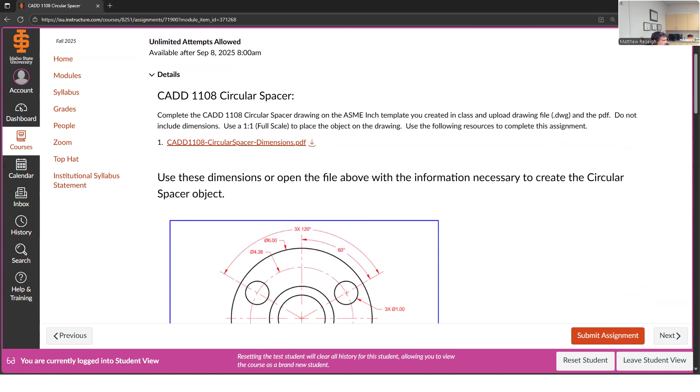All right, so let's open this up. Pretty much the same assignment description, drawing PDF, one-to-one scale. It's a circular spacer. So I've got my PDF here, already open. This one - I'll come back to it in just a second. And then it's essentially this. So here's the dimensions I'll follow, and when we turn it in, it'll just look like this.

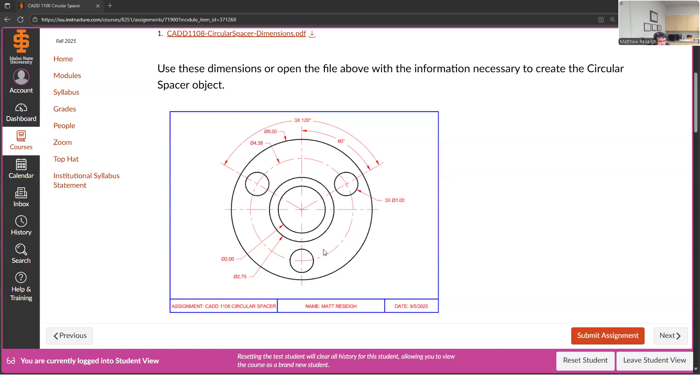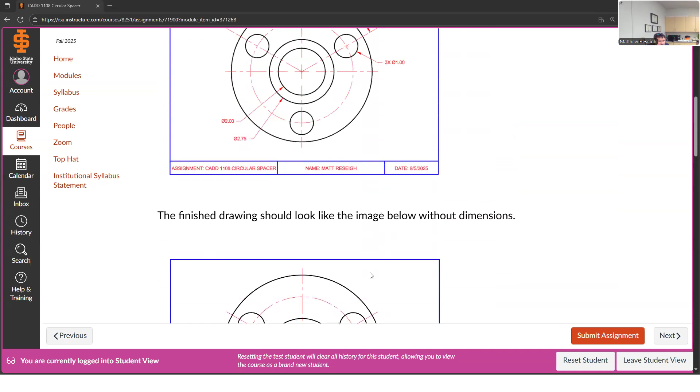One thing I've noticed that I can change on this is maybe I don't need these center lines that are coming from center of everything out to kind of nowhere here. I'll show you why I potentially don't need them on my drawing. It's okay if you included them, but really they are to catch dimensions, and where we're not dimensioning, I don't really need them. The reason those really exist is because I'm pulling a bunch of dimensions from them, referencing some degrees dimensions by degrees that would be captured there. So that's why I can eliminate them, and I'll talk through it when I get there.

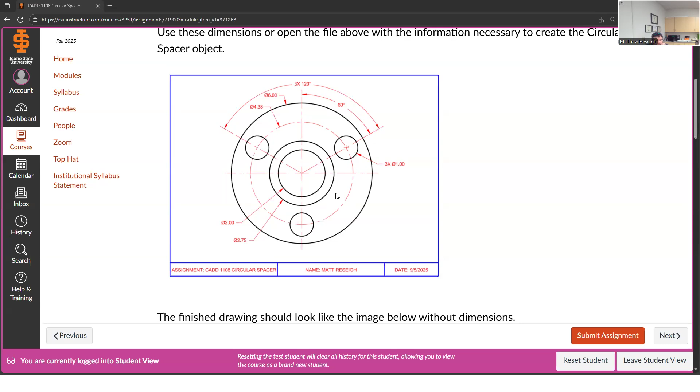The other thing you might not have is this - this one shows a little center mark. I'll zoom in just a little bit - the reason it shows a center mark here is because it's affiliated with this dimension. Once this dimension was put on here, and the way the dimension style was formatted, it dropped that little center mark. You can choose in a dimension style to either leave those marks or remove them, and I actually didn't catch this till I looked at it again. I was like, oh, that thing dropped a center mark - that's actually because of this dimension pointing to it.

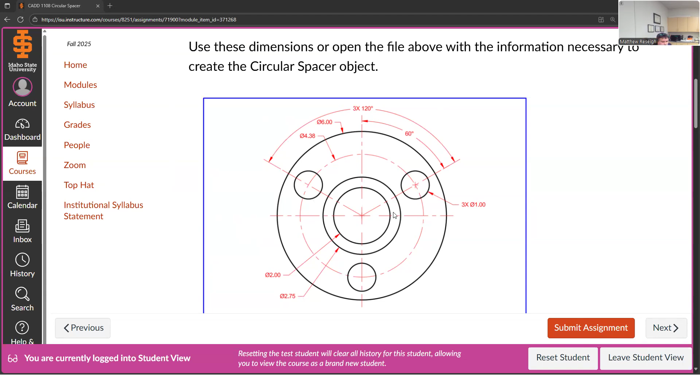And where these ones don't have dimensions pointing to them, they don't have that little center crosshair. So let me just analyze what's going on here just a little bit. I think this is sufficient - I could look at my PDF, but this is fine.

It's just a 6-inch diameter circle, and it's got these two inner circles. One of them's 2-inch diameter, the smaller one, and then the other one comes out 2 3/4 diameter.

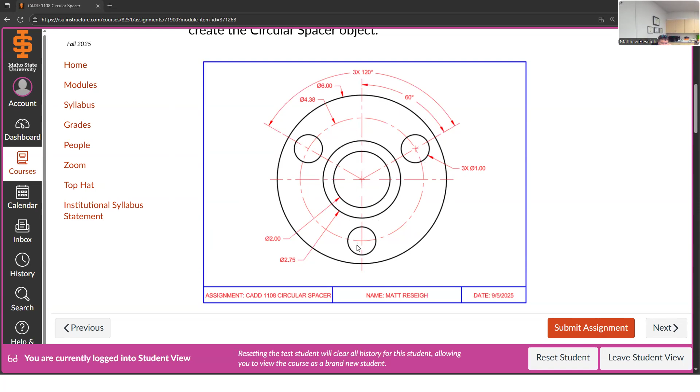And then we have this pattern of three 1-inch diameter holes. This is a new command type that we'll learn while we do this assignment, so I'll focus a lot when I get to putting these holes on. I think the way I'm going to proceed is I'm going to build the large circle and the inner circles, and then I'll probably do my crosshair, my center mark, to show that everything is concentric. And then I'll come and worry about these three holes.

The other thing I need for these three holes is to know how far they are spaced out from center. Like this center, if I could measure this over to where that is, where center meets center - that's what's going on here. This diameter is actually a center line diameter, 4.38, that's where the center would cross in relation to the center of the part, or all of these other three circles, the concentric nature of those, how far out they are. This is 4 3/8 across as a diameter. It helps me know that to even be able to place how far those are out from center. So I'll come back to that when I do those three hole patterns.

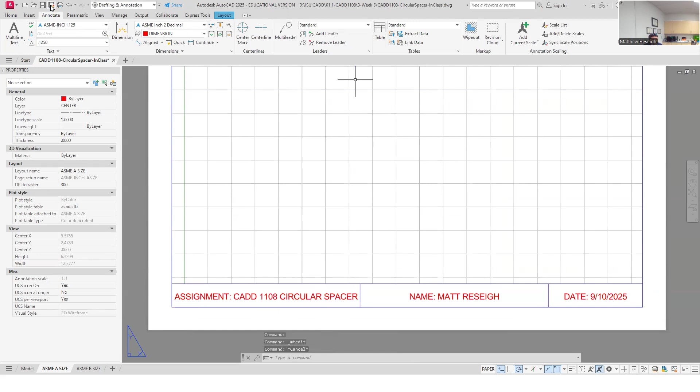Let's do the rest first. So I'm going to go to CAD, and I've got my template already opened. I've actually already jumped in here and renamed this as my circular spacer template, and I've already done a save as. So I opened my template and did a save as, and I'm on a DWG file type, right?

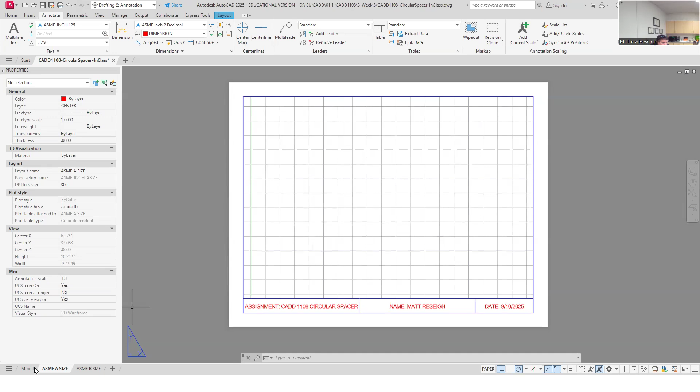I opened my template, saved as, gave it a new name - circular spacer, CADD 1108 circular spacer in class, is what I call it. And then I changed my date. So really, I've done a little bit of work here on my drawing, but I haven't done any modeling yet. So let's jump in and do the part modeling.

So I'm going to jump over to my home tab and jump to my visible object line. I don't feel like I need to build the glass pane for this. I'm just going to start right from the circle information that I have, and whether I draw center radius or center diameter circles, I'll show you something that I have found. I've told you probably several times that center radius I thought was always the default one, and so I also found a little quirk to this.

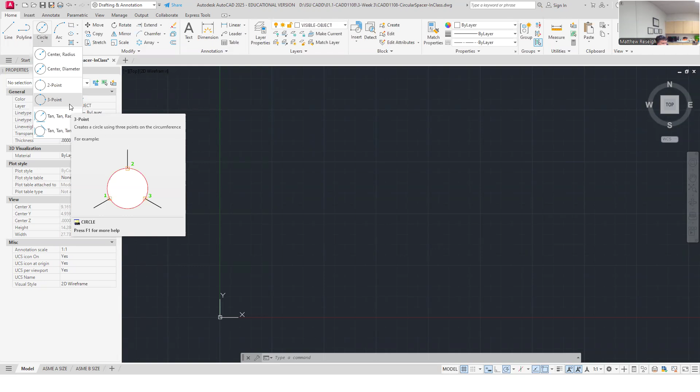If I'm choosing center diameter to draw this first 6-inch diameter, I'll just come out here somewhere. 6-inch diameter is the first one I'm going to draw. Enter. So I've got that one drawn at 6 inches in diameter. Do a quick check. Yep, 6 inch diameter.

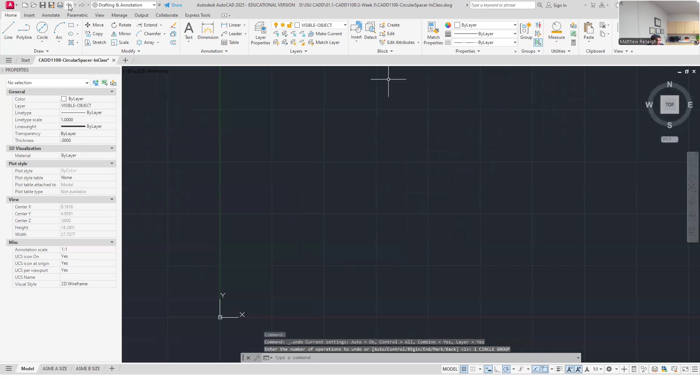So from there, if you want to jump into the last command you use - oh, that might mess me up. Back up just a minute. I'm not going to measure that. I'm going to drop this one more time. Bear with me, I'm trying to get this to maybe malfunction for me a little bit and see if I can troubleshoot what might happen.

So there's me just doing one circle, entering. I've got two more to do. So a quick way is I always could go back up here and do that, or I could actually type in the keystroke for circle, starting with C. I always think the keystroke's going to probably start with the letter that the command starts with. So C for circle, let me type in C.

There's circle, but I'm not going to do that either. Another way to get back into the command you used last is just to hit enter. Enter is to close the command when you're using it, but it also is the way to reopen it really fast. So if I hit enter, it wants to know the center - it goes right back into the last command I used, which is circle in this case, and it's asking to specify the center point of that circle.

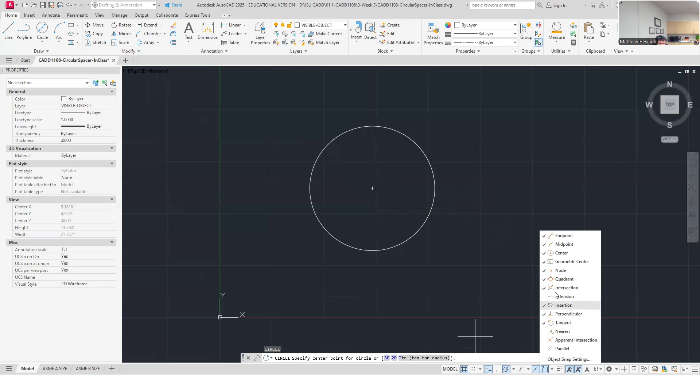So I'm going to have them be concentric because I've got center chosen on my object snaps. I'm going to choose the center so they're concentric, and then I'm going to pull out. But what you will notice is if you go back into the circle command with a quick keyboard shortcut - if you've used center diameter, which is what I use to make that 6 inch diameter one - when I hit enter back into the command, it actually goes to that default CAD way to draw a circle, which is center radius.

So this is perhaps a hiccup if you like to use that. It's not a big deal if you're always used to going back up here and choosing from the drop down the right one, but what I'm saying is I actually have to watch out if I'm using those quick enter commands. It wants this to be a center radius circle. And so you might not know the radius of this one, but you can always, from a center radius, if you look at the command line, get to diameter by typing D.

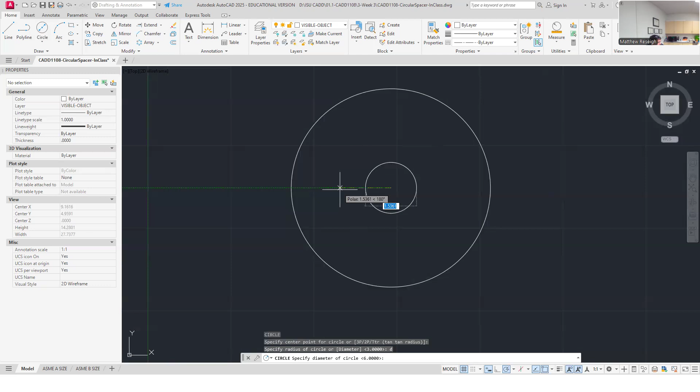And then really on my print, I have like a 2 inch diameter one. So I'll put two, and then I need one more circle. And this is where you can get in trouble, right - it's pretty common just to hit enter to go back into the command, and choose the center. Then the next one is a center radius again, but I can put D for diameter. The reason why the next one might be hard for you to input the radius is if you don't know the radius.

I feel like the radius is easy to see when it's a 6 inch diameter - it's a 3 inch radius. Half the diameter is the radius. If a 2 inch hole, half the diameter is the radius of one.

If I look at this - well, maybe depending on how familiar you are with dimensioning right now, or dimensions in general, or measurements - half of 2 3/4 could be hard for you to come up with in your head. I mean, you have a calculator accessible right here in your CAD that you could just use. You could punch that number in if you wanted to input the radius, or you could just do D for diameter. But I'm just showing you that, yeah.

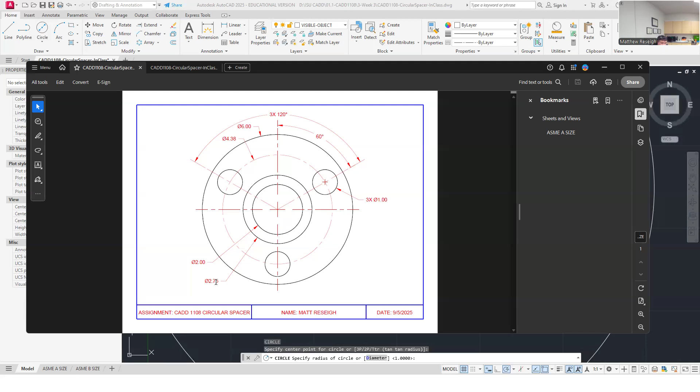So some dimensions get hard, especially some circular weird dimensions, and they might get hard to know what the radius is, especially if the print you're working from shows diameter, or if the sketch from the engineer is talking about diameter of holes or something. Eventually you'll learn that 2.75 - 1 3/8 is half of 2 3/4, or 0.375 is 3/8, 0.375. You'll start to build some familiarity of this as we work with it, and as I bring it up to your attention all the time. So technically I can look at that radius of 2 3/4 and say that's 1 3/8 is the radius of that. But I'll just stick with diameter.

So I'll say D for diameter and say it's 2.75. There's my three holes, three circles.

And let's do some center marks. So I'm going to go to the center layer, and I'm going to go to the annotate tab, and I'm going to grab my center mark. I feel like I'm going to express all the concentric nature of these holes by just choosing that.

And then I just need to format that a little bit for ASME standard, right? I'm going to select it and go over to the properties tab and make sure the extensions on those are 1/4 inch extensions.

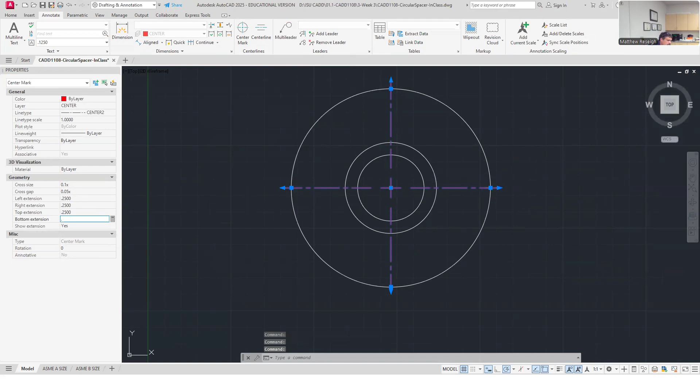And so now this is going to be the ASME standard extension, a 1/4 inch from that triangle to here. Oh, I can see it show up if I hover. That's the ASME standard we'd want. I mean, I could break that rule every once in a while, but if there's no reason to, then don't break that rule.

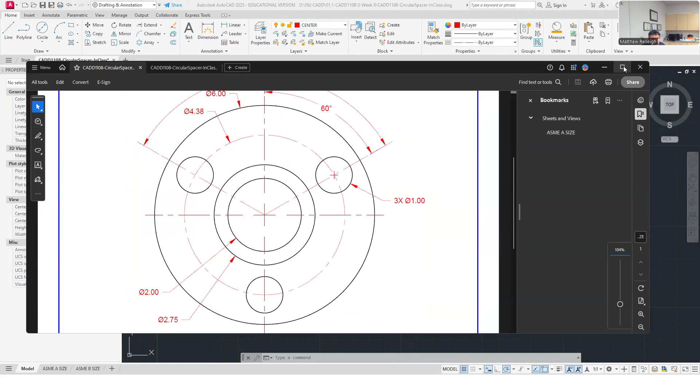Oh, I need one more circle too, and I'm on the circle center layer. Sorry, I need a circle that's on the center layer because my drawing— I'll zoom in a little bit. Maybe I'll just maximize this.

This is where these other visible circles fit, their centers hit this. So I need to draw this circle just by diameter, 4.38. That one might be a little harder to divide in your head, but 3/8 I feel like is shorthand for 0.375. So 4 3/8. Two decimal places will round 0.375 up to 0.38.

And then half of that would be 2, and half of 3/8 is 3/16. So it's kind of funny, you start to learn that 3/4, half of that's 3/8, half of that's 3/16. So this would be 2 and 3/16 if I was using the radius input.

You could use the calculator to figure that out, or you could just go to diameter. So 4.38. And I don't have to use three decimal places, I don't have to assume that that is 3/8 like I just said. I'll just type in this number, 4.38. So let's do that. We'll pull this over.

This one, my circle command, I'll do a center diameter one, sure. The center is going to be all concentric. Just make sure I get on the center. If you have this going on where now I've got like a crosshair and I've got maybe some conflicting object snaps here, remember, if I want to isolate an object snap, this is super important to learn.

So I try to repeat it as many times as I can, but you would hold down Shift and right click. And it brings up this menu that is hard to remember. And it's really how I isolate and override all the other snaps and just really focus on one type of snap. So hold down Shift, right click when you're in the command.

So this hole is going to be kind of hard to place given the geometry that I've placed on my part already. Like with the circles that I've drawn, even with the crosshair or the center mark, I don't really have great geometry available to snap. Like if I wanted to draw this circle first, there's really no object snap on this circle to snap this to at 60 degrees.

I don't use it the same way where maybe I'd cursor over across this 60 degrees. I'll show you the other way I do it. As I look at this, I'd say maybe I won't start with this one because there's no object snap. But here, this one catches my attention because this hole is kind of on my center mark, at the 6 o'clock position of the part.

Because I've drawn this circle where it intersects the crosshair, this is going to be a snappable point here, and it's going to be where I want. I want this circle to be out on this hole circle diameter. I want those centers to match each other, and then I'll be able to pick that where it intersects with that center mark.

That's not intuitive to know what geometry I should draw to help me snap. There are other ways I could do this, but this is the way I visualize as the easiest way to proceed - I'm going to grab a circle by diameter. But what I'm saying is I just don't have a snap up here to snap to. I've got quadrants of circles, I've got centers of circles. I have no way to know where this 60 degrees might be, 60 from 12 o'clock over to there, or 30 degrees from perfectly horizontal up to there. I just don't have a snap there.

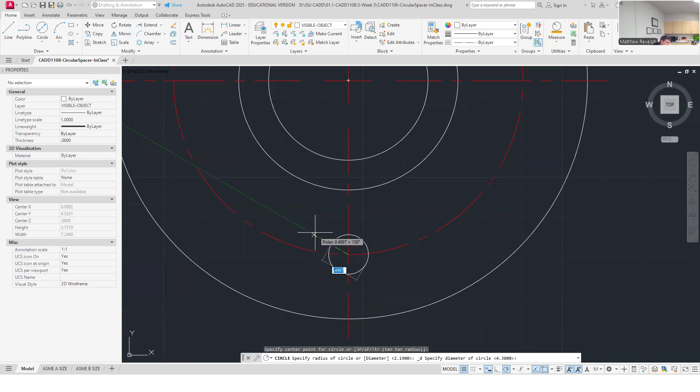But you see, I already have this one. This one shows up as a quadrant snap. So this is a great one to start my hole pattern with. That's 1 inch, right? It's a 1 inch diameter - I'll check that, but I think so. I've got one.

So now I could kind of painstakingly do that. I could do the next one - it wouldn't be wrong to say, if I visualize this and say this is my line, I'm going to come in here and put it across. I can do this by degree and type that in, go from here over 60 and put this in, and then I could have a crosshair to put two more on. But I want to show you this new command, the array command.

On our modify palette, I have to have some geometry to work from to array. Array shows up down here, and yours might look like this - rectangular array. This drop-down list, I didn't explain in the video where I talked about all the commands available in modify. I left it for a time to use it, like now. But the array command is...

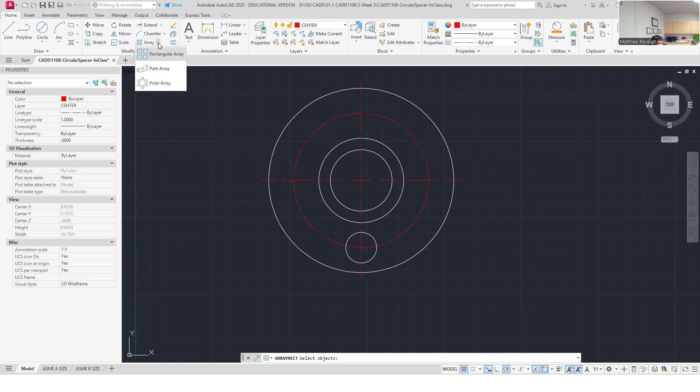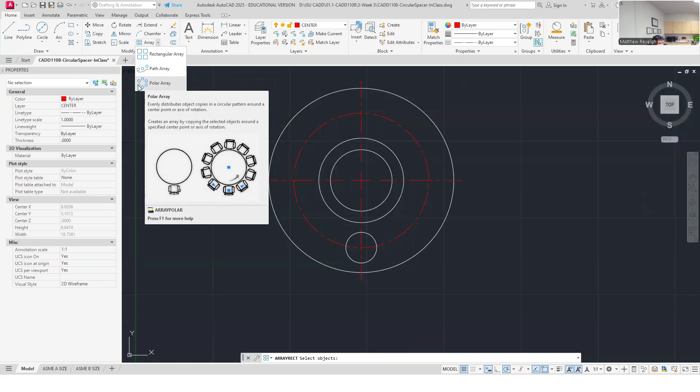I can do rectangular arrays, a path array, or a polar array. I think the primary ones we use in mechanical drafting are polar and rectangular, and path array is rarely used. With a path array I draw some geometry and set it up to follow a path - what's drawn is the geometry, and a path for the geometry to follow, and that's what it's going to do. The rectangular array is like I've drawn one rectangle and I can do columns and rows of repetition. A polar array is where I've drawn one piece of geometry, and then I'm going to array it around a center point.

So I'm going to use polar array here. When you select polar array as a command, it wants to know what objects I want to array. What I'm looking to do is make a three hole pattern. So I'm going to select this is the geometry I want to array, and then I just hit enter or right click.

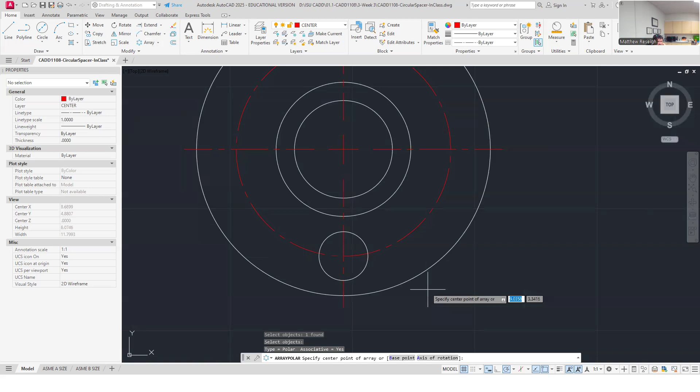The command line says specify center point of array, and down here it does too. I need to add, it's kind of this, the center point of the array is what it's going to array around. So I'm actually going to choose the center here. This main center is the control point of where these are going to be spun around, at the 60 degree or 120 degree increments between each one.

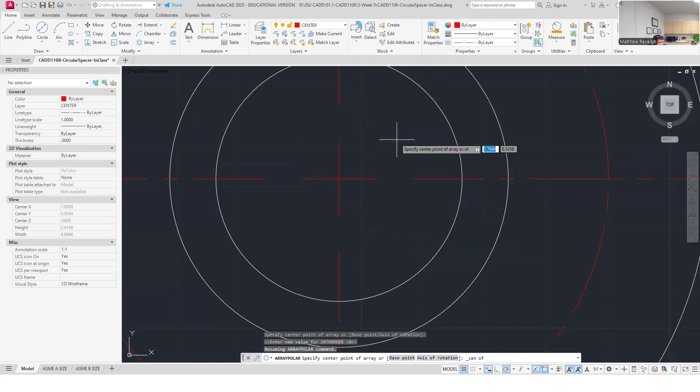In order to specify the center point, I might get some weird object snap showing up. So I can hold down shift, right click, and look for another center specific object snap. Once I do that, I can let go of shift after I've selected it from that menu. It knows now that the only object snap it's on is center. I don't get those quadrants or anything, I just get center once I hover over the geometry that has that kind of snap. So that's what I want.

Then it takes over your ribbon menu and shows a totally new ribbon menu, and it actually shows the geometry. I like that the default on CAD is going to be like a 6-hole pattern array. If I go over here and look, it's a polar type array. I'm just looking at my ribbon menu. The item numbers are 6 by default.

If I hover over this, it's like the angle in between. So if I have a 6-hole pattern, the angle in between is 60 degrees. The reason why it's 60 degrees between each one is because the default is also that I'm arraying around a full 360-degree pattern, right? It just knows based off my items and that my fill is 360 degrees, that I want this pattern to go around the full circle. It knows that's 60 degrees between.

So the only thing I really have to change is the amount that I need here, unless I'm doing something beyond filling a 360-degree circle. But if I just put in 3 here and click down to the next box, it already knows if you have 3 items filling around a 360-degree circle, there's going to be 120 degrees between each one. So it already does that for me.

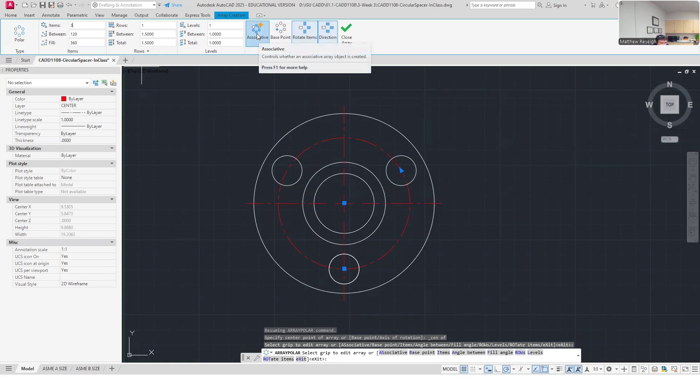The next one over, rows and levels. Rows is definitely going to be for a rectangular pattern, but I'm not going to do anything with these ones yet. I'm going to move over from the properties, and I'm just going to keep this on associative. Then I'm going to say close array, and it will go back to my regular ribbon menu. And then those have different properties.

Now when I actually go to select these, they are kind of joined to each other, like I can't independently move these without affecting the others. When you select these items, it opens up that ribbon menu again to just show you, hey, I'm in an array. If you wanted to localize, I probably need to explode my array, and you can do that. You can use the explode command to explode an array and get them down to where they're just individual geometry.

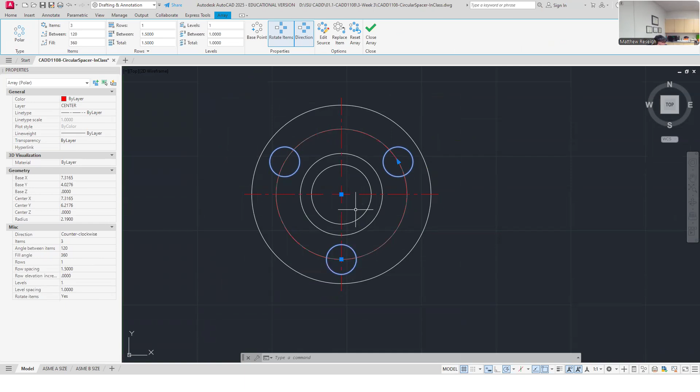But I want mine to keep as this pattern. It's really the way to do this because it's powerful. I can come in and change and modify and make changes quick if I need to. So yeah, this is an array, it's just an exposure to the array command.

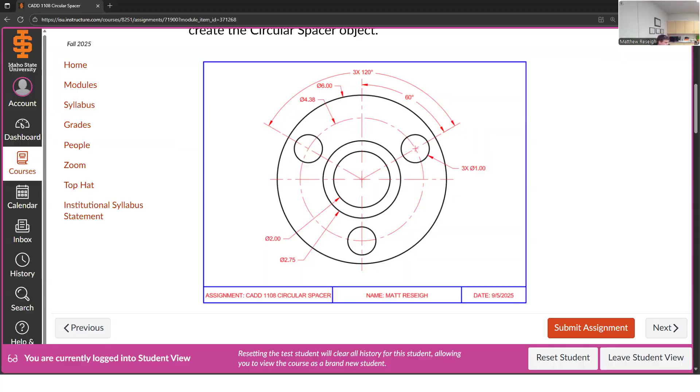Really, this is done. Like I've said, I really don't need to draw these center lines out to the center of the circle and beyond, until I start dimensioning. That's why the assignment really carries those lines, to be able to carry the dimensions. So I'm not going to worry about that. I'm going to call this done.

I'm going to look at how it looks like on paper. I need to make a little adjustment here to unlock my viewport. Let's pan this over, 1-to-1 scale. I accidentally scrolled a little bit, so I'll set this back to 1-to-1. And then let's center it roughly, lock it down. Let's take a look at this.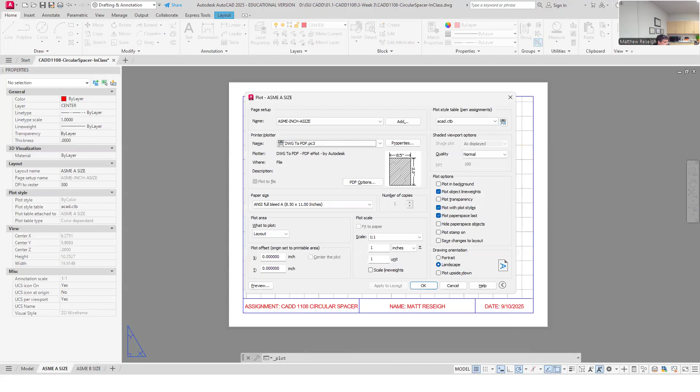I'm gonna make sure if I had this open before, I'm gonna close it. I don't think I need that one anymore either, but I'll leave that one open. So I previewed that, I like the look of the preview. Yeah, I like the look of the line weights. Nothing catches my eye that's incorrect here.

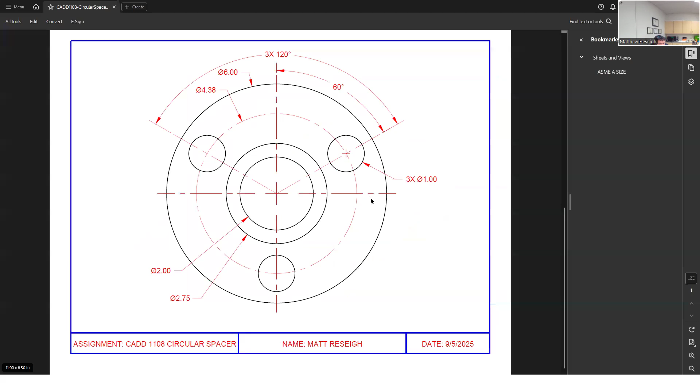So let's go ahead and end this, save it I mean. I think I have one that I changed, this one, circular spacer in class. I'm gonna save it, I'm gonna overwrite it on mine. You probably don't have this saved. I did, but there it is, it's my PDF. Go ahead and close that down. That's what I'll submit along with my drawing. So this one's done, and I think turn off that. I'll save that. Catch you on the next one.